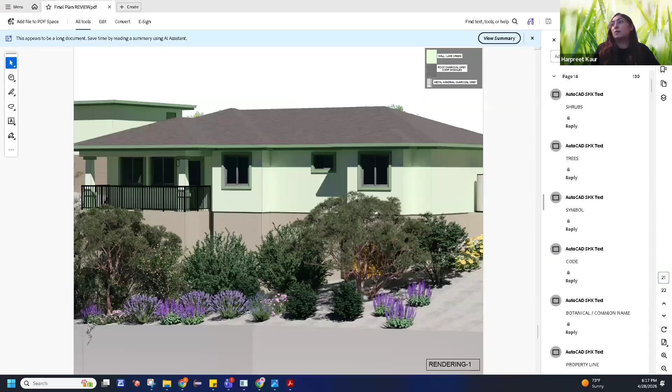Speak, you're off mute, Harpreet. Yeah - I'm just wondering, the other thing that seemed important before is, has the foundation issue been squared away? Are they now going to be more piers?

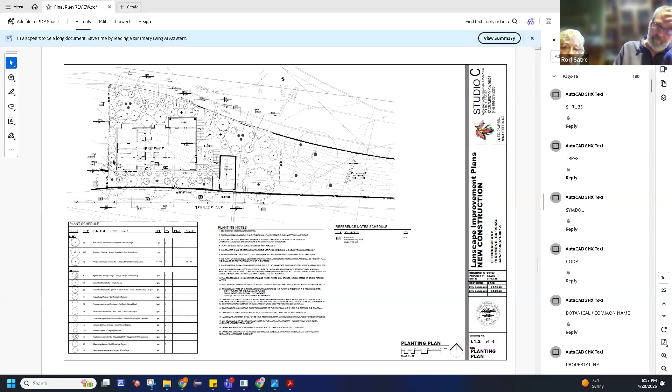So yes, it was always piers, so it's going to be on piers. I'm not exactly sure how many, but definitely it's going to be piers. And to hide those piers, we are going to have the wall - it's not a retaining wall, it's going to be a wood wall with stucco on top of it. That's what it is going to be.

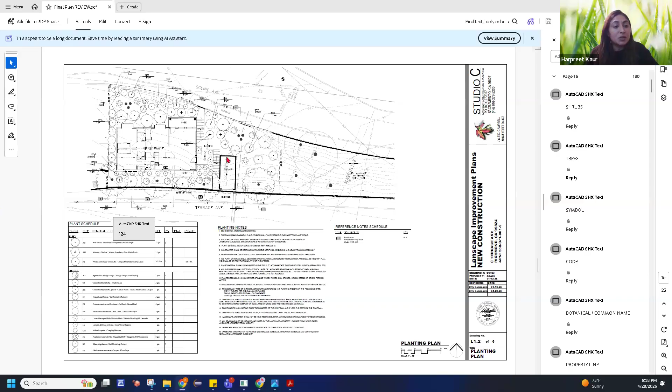On which side? It's below the house, facing Scenic. Yes, it's going to face Scenic. If you can see this wall - this wall - this is going to face Scenic, but it's not going to be that visible, because it's kind of an entire stucco wall, and underneath that it's going to be the pillars.

So that is what you've got highlighted there, is going to be stucco over wood? That's correct.

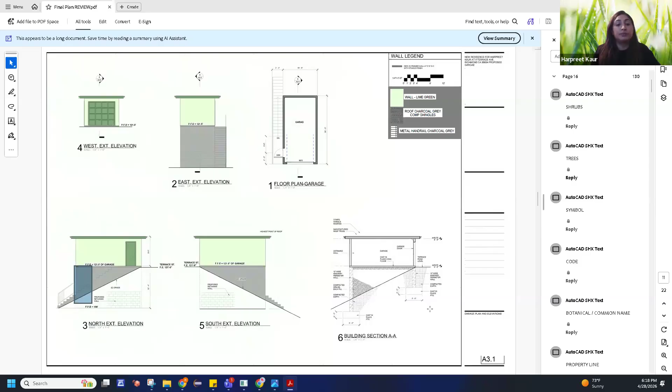And that's sort of the 5 feet that the house is raised from the existing grade, from the grade of my yard. 5 feet raised is where the house begins. She's not digging into where the other retaining wall is.

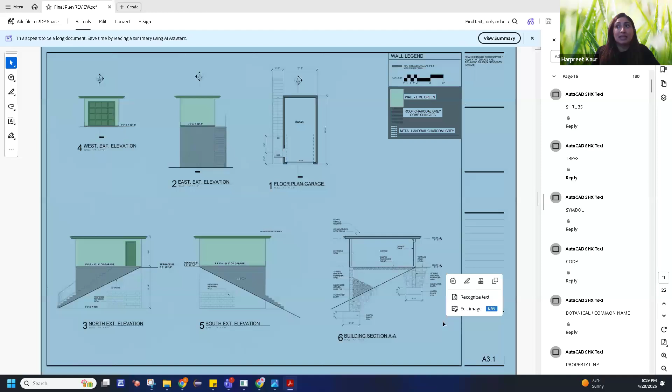I am not good at reading this thing, but when I spoke to Arun last time, what he told me is that this is really a very complex site, and if you're going to lower it more, the roof is going to be exactly the same as the terrace, so that's not possible to make it too low.

But what you don't have now, you said you're going to have a stucco wall and it's wood framing. Previously, it looked like you were going to infill that area with a block wall, and then put dirt in. But you're not. That's going to be vacant at this time. It's going to be a dead space, unconditioned, unused space.

Either way, whether we have a stucco wall or not, inside it's going to be empty space. In future, if we want, we can use it just for storage or something below the home. But that wall is going to be too heavy on the property if we have that retaining wall below. Our structural engineer said that it's good to have a stucco wall instead of a stone wall - just replace it, because that's going to make the house very light.

And the reason I'm sharing this is the trees - we're adding more trees towards David's home, so that's going to give us additional privacy. Earlier, we didn't have trees over here.

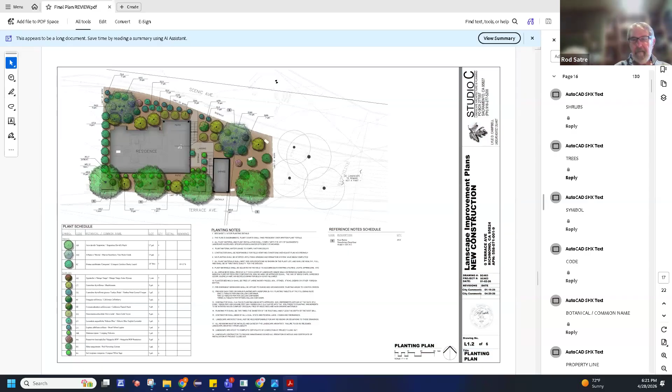I think the more important thing is if the foundation is actually accurate. Yeah, is it? Yeah, so you've seen that there's new piers - that's going to help. We're just going to put - they're not going to have a wall on the street. It's not going to have a backfill and concrete block.

Okay, because to be honest, the lot is a huge lot - 10,000 square feet - but the lot is not usable. Only like 2,000 or 2,500 of the lot is usable, and we're just building a 1,200 square foot home. It's not a big home because the issue is with the lot. We can't have a bigger home, and we can't move the home either to the side, which Rod suggested, moving the home away from the property line because of privacy concerns.

So I agreed to what David said, because the concerns were mainly from him, and I wanted to make sure he's happy too, because we are going to be neighbors going forward. So I made sure to do whatever I can do which can save me cost, and even cover his privacy concerns.

Rod, are you listening? I am. So what are you writing? I'm writing on my leg. I'm not hiding it. Oh. I'll be right back, sorry about it. Just give me 1 minute.

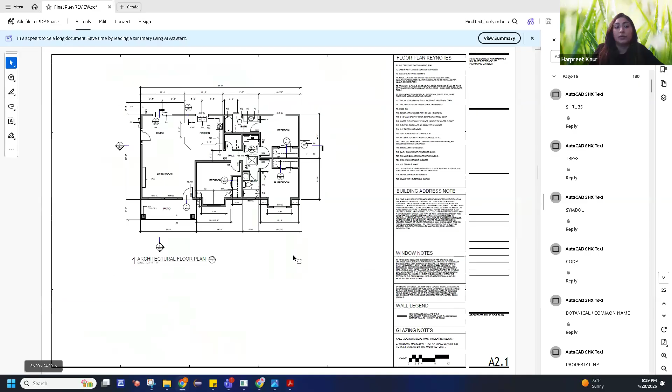To A2.1? To the one you were on. No, let's go back to the drawing you were on. I was here. Here. No.

Yeah, that's what I'm not technical, but what he told me is that your roof, in simple words, is going to be exactly parallel to the road, which would make it too low. So it's not a good idea.

All right, this is Rod. On drawing 1 of this same page, I see little dashed lines that look like rectangles. Are those skylights?

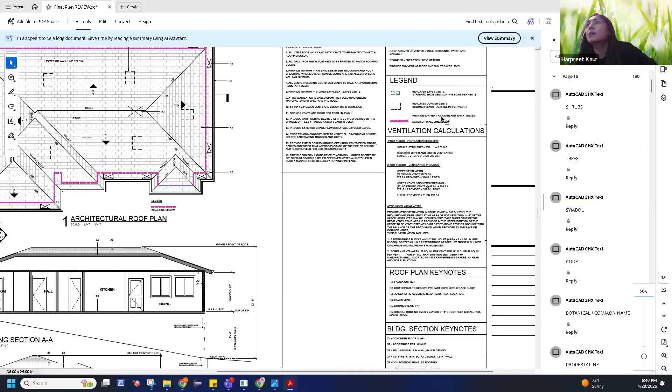These are some dormer vents. Oh, dormer vents. Okay, yeah.

All right, I was just going to say, if you have a skylight on that side by the Dolberg property, you'd lose the privacy you would have otherwise. But if they're just vents, then fine. Yeah, those are the vents.

Okay, does the committee need to talk about this? Bring it up. So are we good with the foundation? Is everybody okay with what the drawings show for the foundation?

Well, it was okay. The only thing is, effectively on the downhill side you have a 2-story home visually, and on the uphill side you're right at the grade. So not having it filled in with dirt is good in that you're not putting extra load. It does mean, from a seismic standpoint, that you've got to make sure that lower unoccupied section is sturdily built so it doesn't collapse and the house falls over. But that's for your engineer, not us.

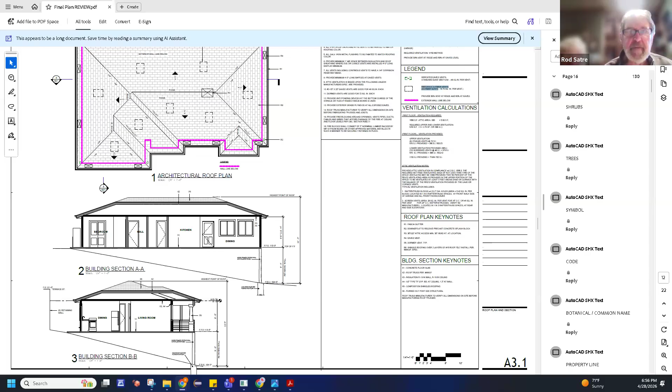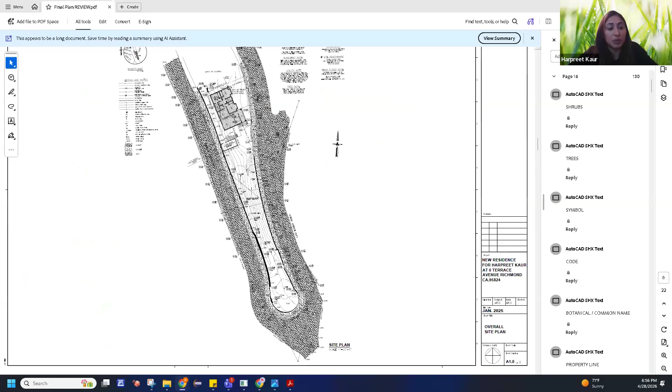Okay, I'm going back to the list. The water drainage plan, did we see a plan for the water drainage? Well, I'm not technical, and I think that's already somewhere in the plans which were shared. I think I also shared it with Rod in one of the emails, just for the drainage. It's somewhere here, I'm not sure exactly where.

I don't know, Rod, if you got a chance to see the email where I sent that one page with the drainage. I don't know if this is the one. So where's the drainage? Do you see drainage on that? It just shows some cross sections. So there is drainage, that is a drainage plan? Can you expand the view so we're not just at the very bottom left?

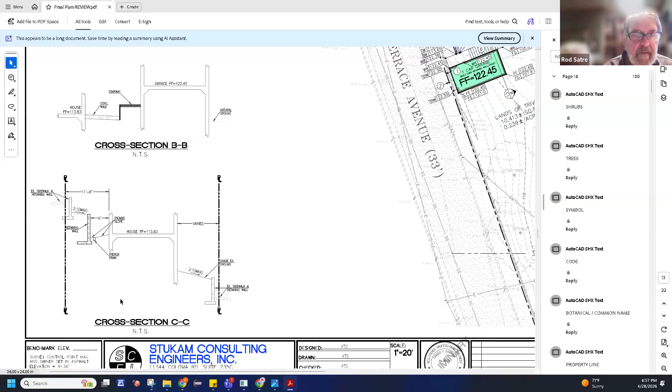So the details, go to the details that are on the left of the drawing. Is this the one? I think so. Do you know?

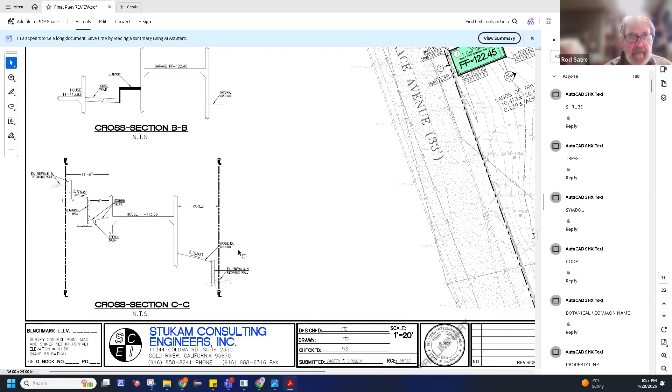Okay, so you have some French drains in certain areas. If we look at cross section CC on the left, you show a French drain. The problem might be they've got a French drain there, but they don't have a French drain on the other side. So if you take a look at the invert on section CC, blow that up a little bit more if you can.

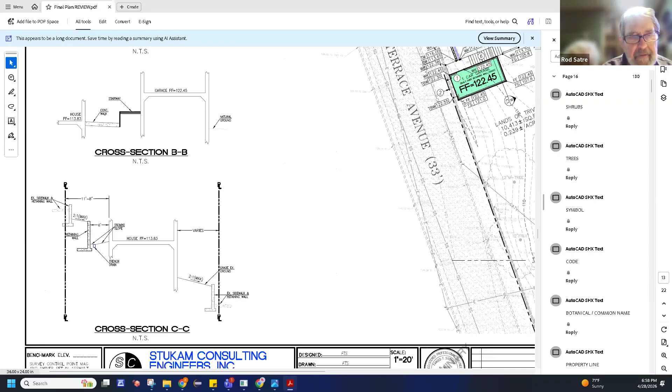Where's the cut for CC? The bottom left of the drawing. No, I mean in the main drawing. Well, you can see the 2%, 2-to-1 foot max grade, and then you see this retaining wall, and then it says French drain. No, but I mean, where is that? Where is the cut in the plan itself? Is it through the house, through the garage?

So cross section CC, let's go back to the right side of the drawing. Yeah, there, CC, I see. Okay. Yes, and now go back to the detail. There you go. No, go left. It's not yet. Okay, there you go.

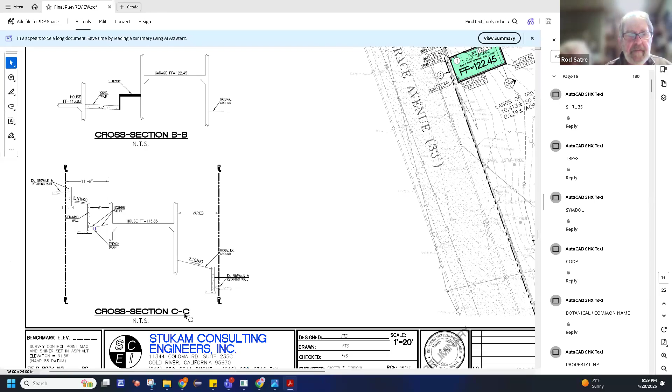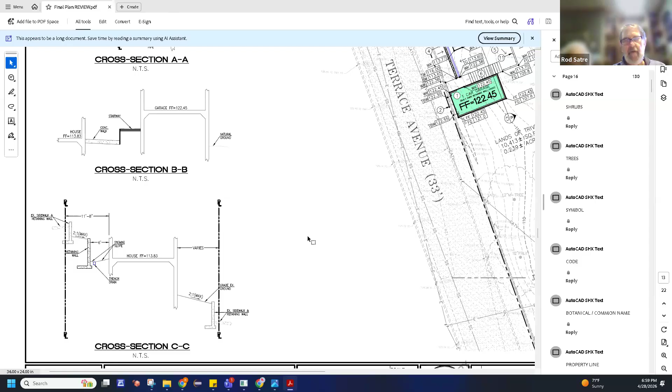See how they have a French drain going from the house. They have a French drain, but that retaining wall, if you're retaining dirt to the left of that middle retaining wall, where it says retaining wall, it shows 6 feet from the building wall, there should be a French drain on the opposite side of that. In other words, that retaining wall is going to trap water behind it, and that needs to be drained.

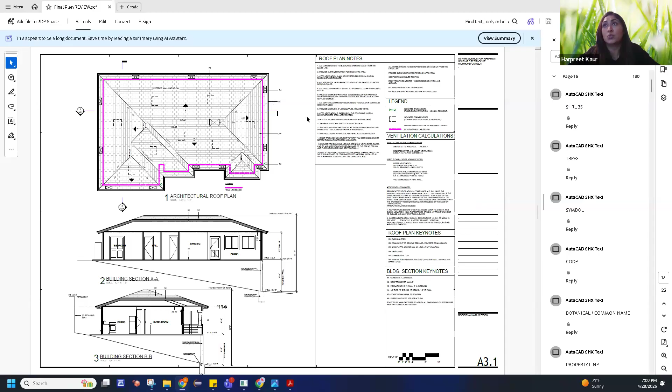No, I, but you think, oh sorry, I think I lost it. Okay, I think what I was telling, this is very slow. One second. So they were saying it's going to be draining towards this side. Oh okay, that's what he explained to me when I visited with him on site.

So what he explained to me was that the water is not going to be stored here because it's going to harm the wall, right? So either way we have stairs here, but it's going to go right towards this edge of the property. Okay, that's just it - anytime you have a retaining wall, the side that holds the dirt has to have relief for draining the water that's behind, under the dirt. Otherwise you're planning on having 65 pounds per square foot pressure on that wall.

I think that wall is already having those holes, but right now it's filled with dirt. Yeah, that needs to be cleaned out when we go to work on the repair. Yeah, and then the house, any of the new stuff - it's just right now, as they show the retaining walls, the drainage is not sufficient. It's not going to meet the criteria for draining wall French drains.

So just say, I mean, your civil engineer should be carefully looking at that. But whoever detailed this, you should show the retained earth and the open side - you don't have to have drainage if it's open. And what I see there is the French drain they installed was downgrading of the retaining wall instead of upgrading of the retaining wall. That's all, it's an issue, and I'll just put a note that the French drains need to be installed appropriately.

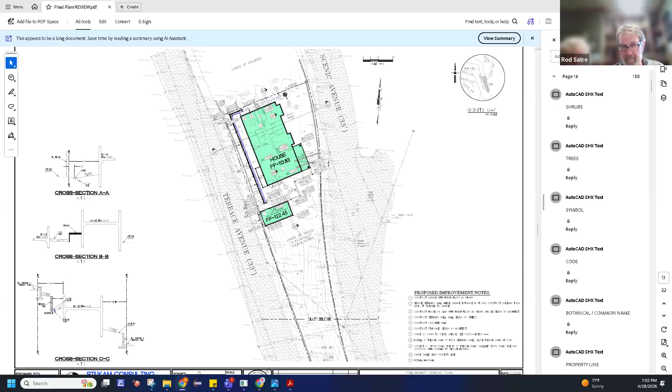The harder place is probably going to be the downspouts on the scenic side. That's the water that's very close to the existing retaining wall. They'll probably have to put some pits in or something, just because all the water that hits the house right now is probably infiltrating. Do they have any of those pits? No, pits would be when you build the house, bypassing the wall.

Those are the ones that disperse the water or break up the energy of the water, correct? Well, essentially a drainage pit. Right, so that breaks up the energy of the water. That's essentially how the water enters into the ground, not just a big rush of water going out, but dispersion. Yeah, because right now whatever hits the roof is going into the ground, and probably most of that bypasses the lower retaining wall. But once you put the house down and put rain gutters on that side, you're going to concentrate more of the water closer to the wall. So figuring out, I'm sure your engineer can figure it out, but that's probably the harder place than above.

Correct. And I haven't looked at that area when it's raining. David, any comment on, do you see the terrace becoming a small river or anything, or nothing? When it rains hard, you mean? Yeah. No, it drains.

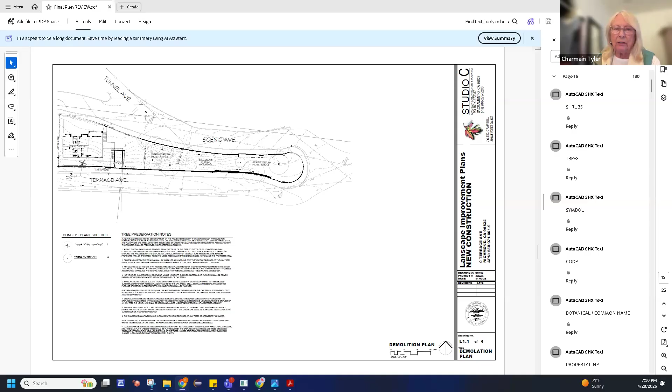Alrighty, what's next on the list? There's one more item on the original list I started earlier, and that's to continue the discussion about the stairs. There were some stairs as part of the lower retaining wall, I believe. I may have it wrong, but there were some stairs having to do with a retaining wall.

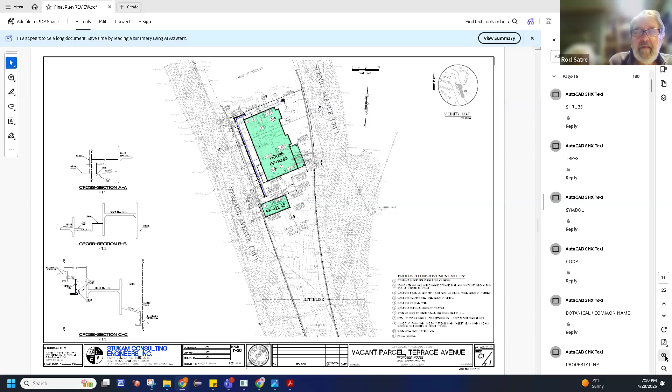Yeah, they go to a patio, and there's stairs that went right down to Scenic. But did it not also go to a patio area? They came from a patio area. Oh, they're right here. Is there concern about that? Oh, there they are.

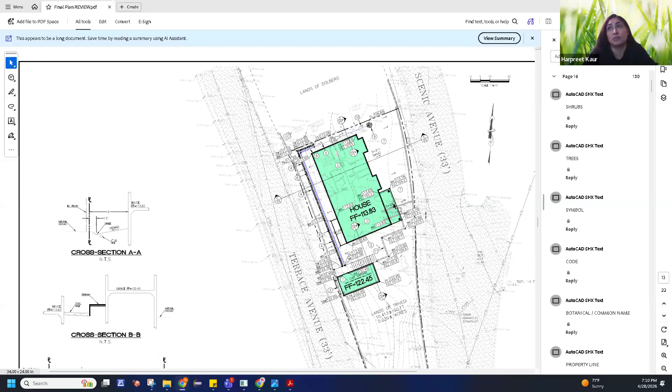What I'd ask - this shows the house over the stairs, which is incorrect. No, that's not going to be over. We have enough space that when you come right from here, it's going to be toward this side, so it's not going to be over the stairs.

But it doesn't make sense if it's over the stairs, right? We can't utilize it, except right there, that's a balcony that'll be up in the air. You could actually have stairs underneath it and probably still clear them.

So are the stairs not actually decided upon yet? Is that not accurate to the plans we see? No, this is accurate, the stairs are going to be right here. It's not going to be exactly underneath, but I believe there's going to be a space here for us to utilize our front yard. I think John seems to be very technical, so I'm not sure, but it's definitely not going to be underneath, and the house is not going to be on top of the stairs - that small rectangle is a porch.

Does it have a wall that goes all the way down to the ground, or does it have piers? No, let me zoom in a bit more. So this portion here is the patio - the one you see here is the patio. The wall is going to end here.

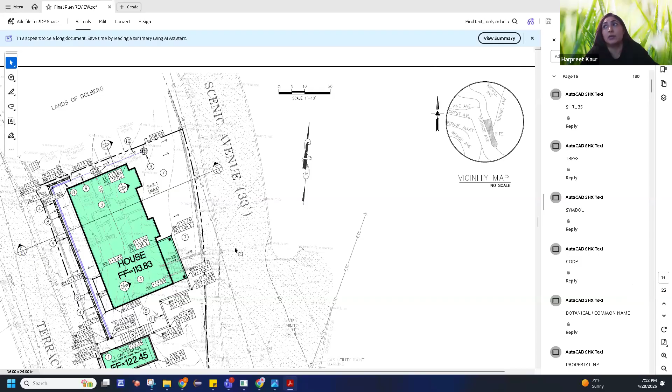Let me go to the top one right here. So the stairs are going to be coming under this one. Show me which one - you've got to shift the drawing over to the left for us to see. There we go, so the stairs are going to be right here. So this is the patio, and the wall is going to either end here.

Is it actually like a wooden deck? Kind of a wooden deck - patios normally mean you're on grade, so this is really a wooden deck.

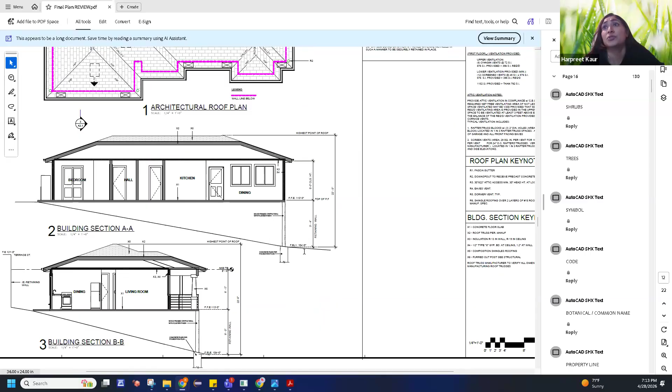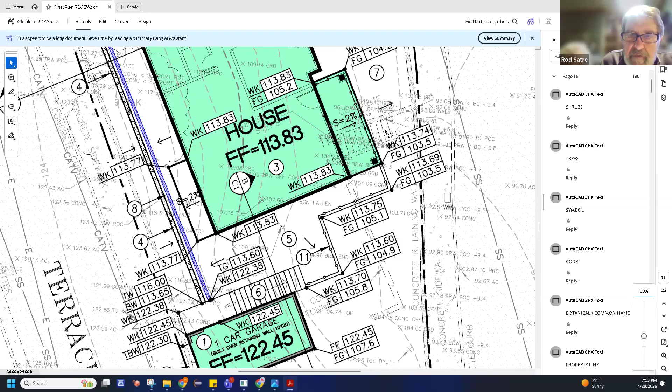And how big is it? I think it's 5 feet or something. It should be minimum 5 feet, but I can check. That one you just had with the green, I think had a dimension on it. I didn't see it change - blow up that part there. No, there's a slope of 2%, but it doesn't show a width. It's not going to be more than 5 or so, because this is just a small patio for some chairs.

And it's entered from what room in the house? That's a living area. Okay, that makes sense. Okay, that's your choice.

So what now? Charmain, anything else? No, that was the list. Does the committee need to have any more discussions?

Somebody's not doing well with their whatever.

Charmain, you're breaking up. We couldn't hear you, but you couldn't make any sense, it was all breaking up. Can you hear me now? Okay, it's fine now. My Zoom stopped working and then it came back on. So what I said was, we've gone through the list and I think we've discussed all the outstanding issues.

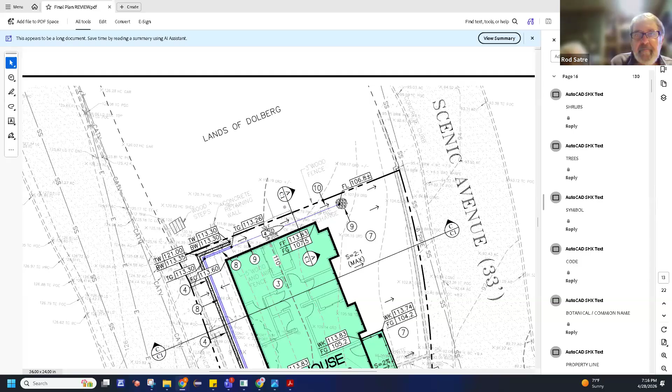Yeah, I understand the engineers aren't here, but I think the drainage part was more technical, Rod, and I believe that's something John was able to answer. I'm assuming he has a pretty good sense of reading these plans. But apart from that, the more concerns were from David.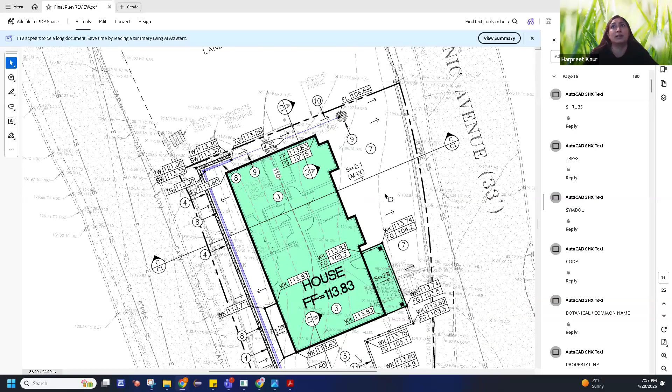That's nothing between the engineers, it was between me and him. It's a mutual understanding about privacy, so that's the main concern. The drainage part and other stuff is all about city approval and some technical things my engineers can definitely answer. But apart from that, the concerns were mostly from David, which I've already taken care of, and he's already satisfied with it.

So should the committee vote? I'll just go through the list and we can say if anything is still conditional or outstanding. So house foundation, the piers, the grade, and all of that - is that okay?

Rod? Yeah, the foundation is now a pier with a wood stucco lower wall. And the retaining wall, are we okay with that? It's going to be repaired. Yep, yep.

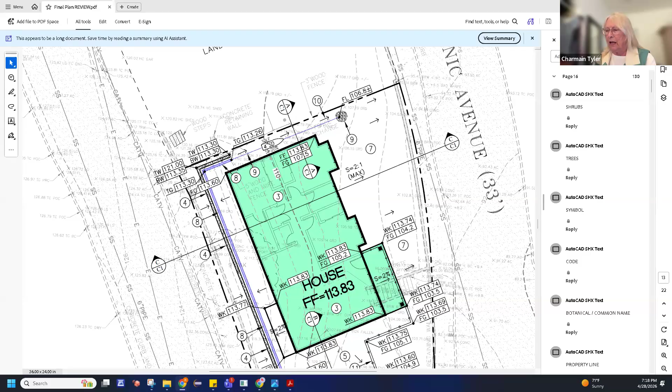And the tree we talked about, we're okay with that. The orientation of the building is not going to change. North side landscaping and fencing needs city approval.

Okay, say it again please. North side landscaping and or fencing needs city approval.

Yeah, just to let you know, Rod, before this meeting I already shared those plans with the city a few weeks ago, so they didn't raise any concerns.

Okay, and Richard from city planning was about to send me an approval. He sent it over email, but not in writing yet because I have to go over some things with him, but he didn't raise concerns about the landscaping.

I think that's Charmain talking about the fence. Okay, you got to - okay, that was murky. We couldn't hear what you were saying again.

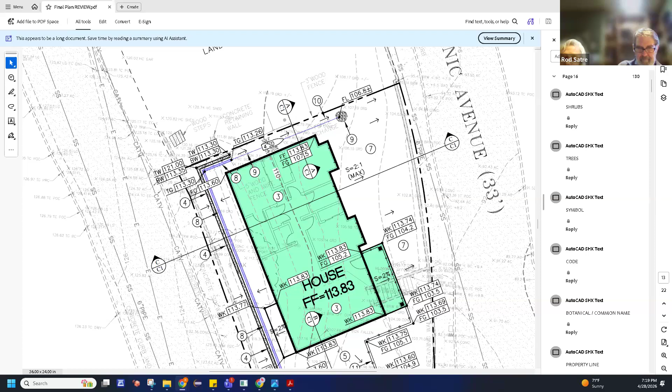Okay, back on the list. Can you hear me now? Yes. Okay, fence - where the fence is not really planned yet, right, so we'll just say okay for that.

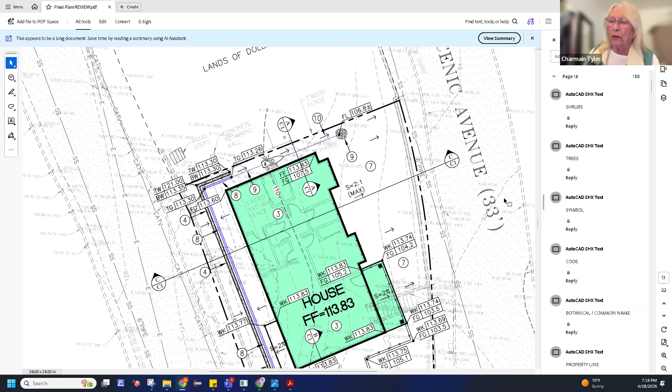We'll just say stairs need city approval. Okay. And do we need to say anything about the stairs? No, no. Okay, and what do you want to say about the water drainage plan?

It needs to be expanded. Well, I essentially said drainage needs on-site retention pits. Say it again because I didn't get that - it's actually there in that drawing.

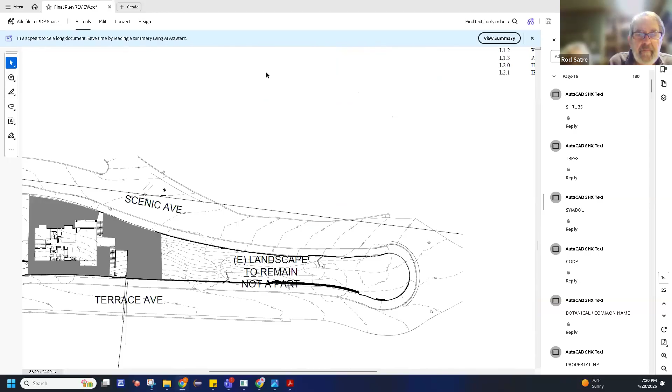The pit is there - what was that, John? If you go back to where you were just viewing, it's marked as a 9. Oh. Go up just a little bit more.

Right there, you see the 9? It's on top of the screen, it's got a flow line marked in it. That's where the water's going, and it's going to the scenic. Well, it's a pit, looks like they're digging a pit there, with that circle and X. Isn't there going to be one near the top of that drawing? Yeah, you can see the flow line too, going down to it. Let's take a look at the notes on this drawing, I can't see note 9.

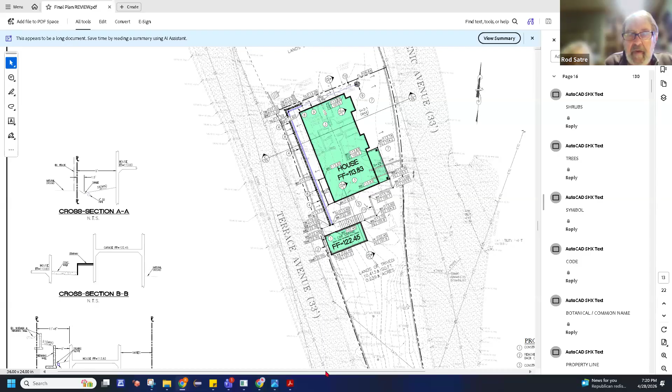Note 9 is probably going to say it's a drainage pit. Can you read it? Connect the 4-inch storm drain pipe to 6-inch trench drain, daylight storm drain pipe, and surround with cobbles to reduce erosion. But the way he's got that going, we're going to be diverting that water to scenic.

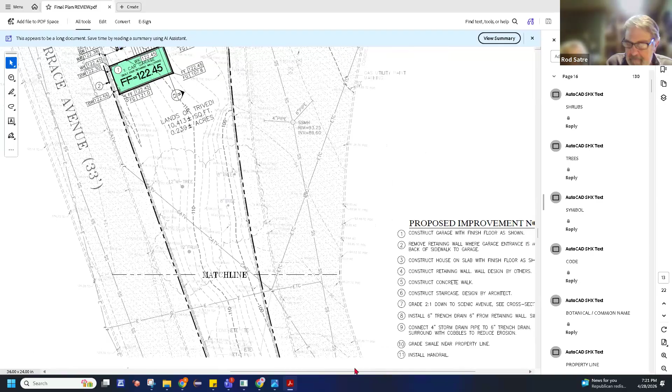Were we happy with that, or are we going to ask them to change it? I'd be surprised if the city lets them do that. Yeah, normally you want to have an infiltration basin so that the water that comes off the building doesn't just sheet flow off the building or in a small little streamlet, but instead disappears and goes underground.

And down here at this end of the property too. So before now it's going to the east. What we're suggesting is that the drainage goes to the south, to the unimproved portions of the property.

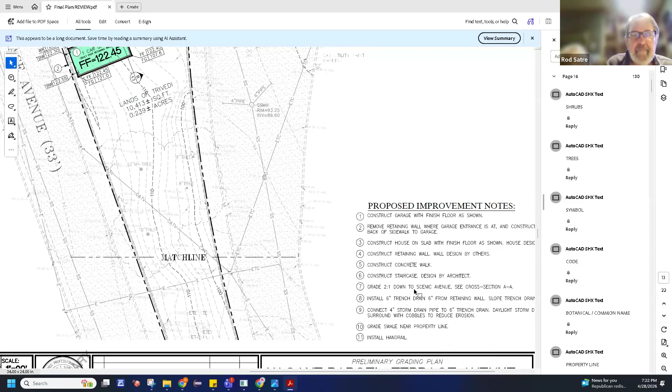Isn't that how you understand it would be preferred, John? Well, I'm not sure on the details of it, but I think we could just say conditioned on retaining stormwater on site.

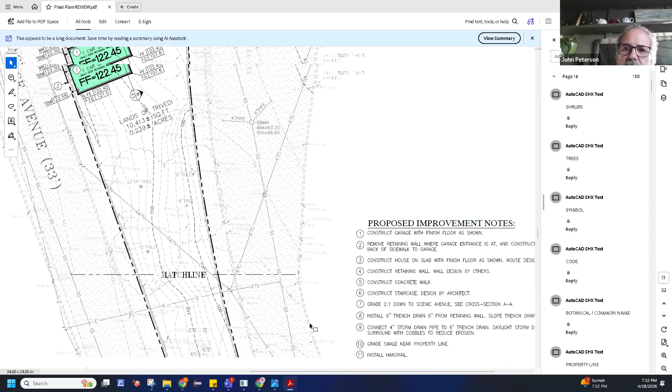Yeah, that's a good way to say it. And perhaps, I mean, just the way it is, the drainage on that side of Point Richmond, there's so much problem with that. I think all the new construction on Washington and stuff, they were very careful about not letting a drop come off the property. So also it would hit the retaining walls that they're trying to preserve too, wouldn't it?

Well, then it would drain through the retaining walls with their drain open. They have weeps on that retaining wall on scenic that aren't weeping right now. That's the problem. But if they open them up, they're going to drain more.

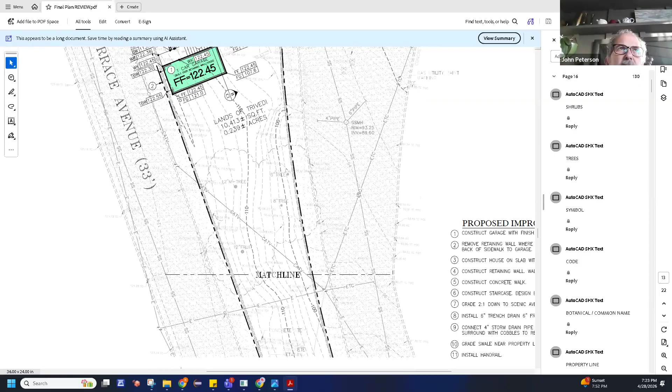I mean, the whole idea is that you don't have flash flooding. You are going to have slow weeping if you allow it to. Well, if you concentrate it too much in one area, it's going to be an issue for why a wall should be taken to the other part, like you say, to the unimproved side of the property. It has more space to build what you might need to build underground.

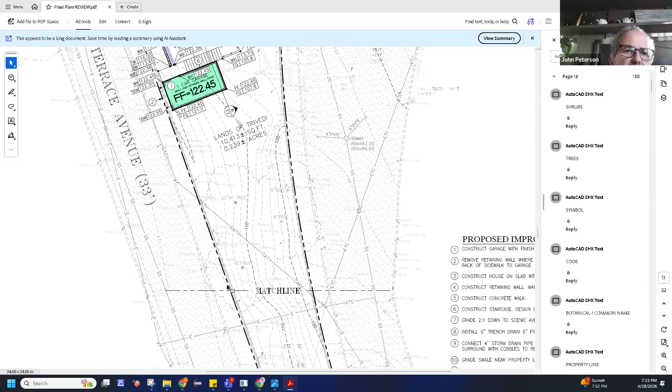Yeah, there's lots of options, but I think we could just say conditioned on retaining the stormwater on the property. Yeah, that's a good way. So it's not going all to the street, so Greg doesn't see it going into his garage.

Is that clear, Charmain? Yeah. I just wrote down what John said: condition on maintaining stormwater on site. Yes, right.

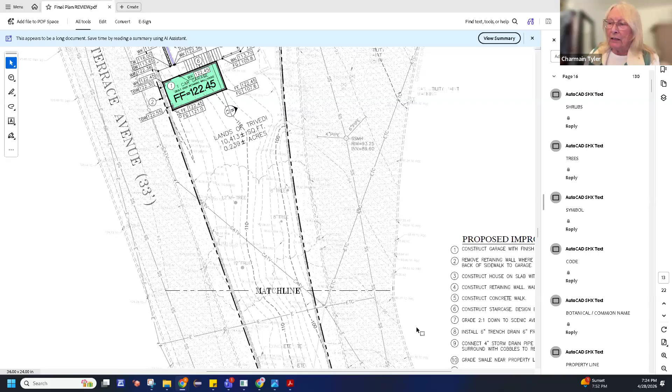So what I have is that they need city approval for the north landscaping. They need city approval for the fence. Stormwater needs to be maintained on site. And that's all that I have. Everything else is now okay.

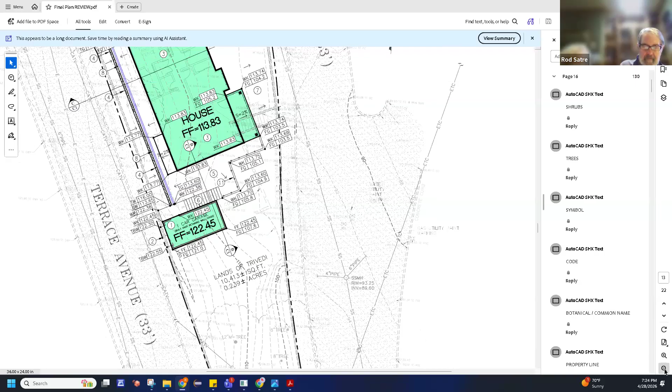So do we approve? Okay, so we conditionally approve. Raise your hand if you conditionally approve. Anyone opposed?

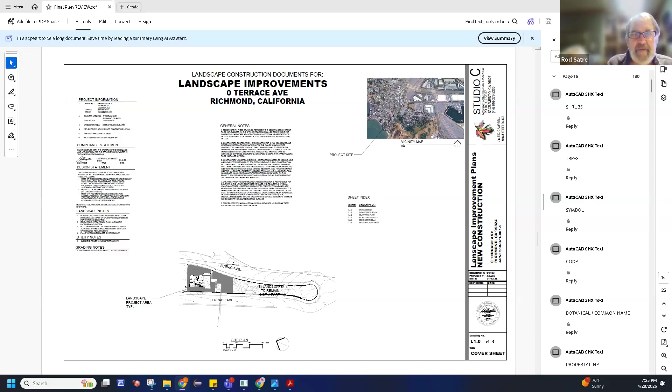What's up? Harpreet's waving, but Greg, you don't have to stay on anymore. Maybe he's not even there. Okay, this is as private as it's going to be, I guess, John, unless you want to call me. Well, I wanted to ask about the house next to me, 707, when it went through land use, what's actually gotten built or what they're building right now is much closer than I remember when it went through the land use process. Let me see, so is this 707, and what street are you on?

He's going to share a picture. He's talking, but he's on mute. Yeah, you're on mute, John.